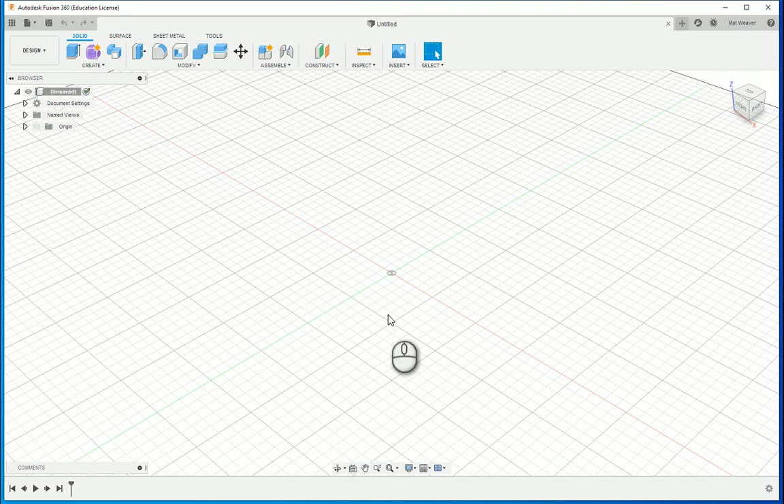Okay, so we start by drawing the holes for the speakers because that's the main point. So I'm going to select a view from which to draw, and I'm going to draw at the front because that's where the speakers are going to be for me. And I'm going to create a new sketch, select that, and I'm going to press the letter C for circle, or I could just click that one there.

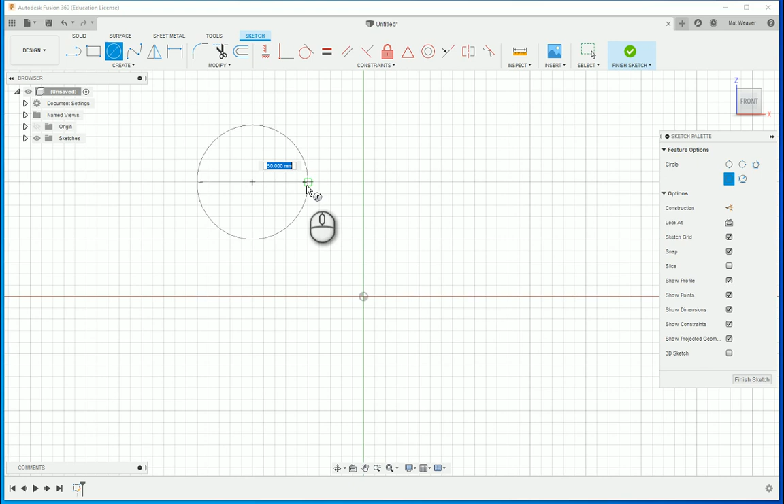I'm going to choose an arbitrary point, so anywhere to start, and just to clarify that the holes for your speakers should be about 50. The next part is the construction detail, and that is so that I can get the exact points for the holes to secure the speakers in.

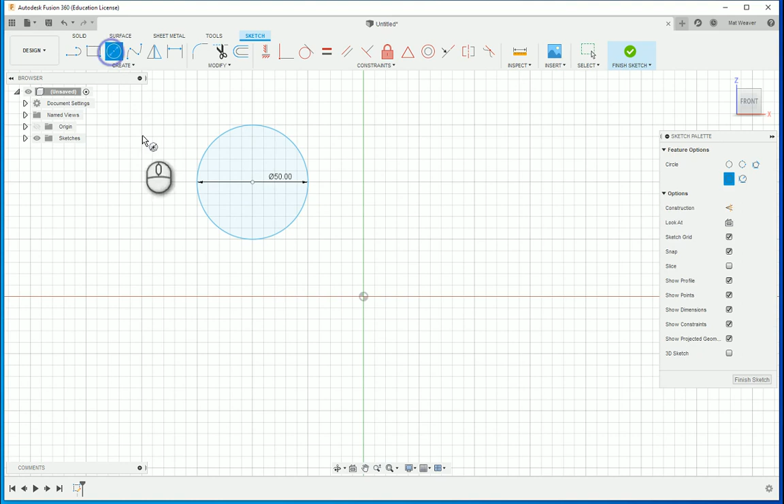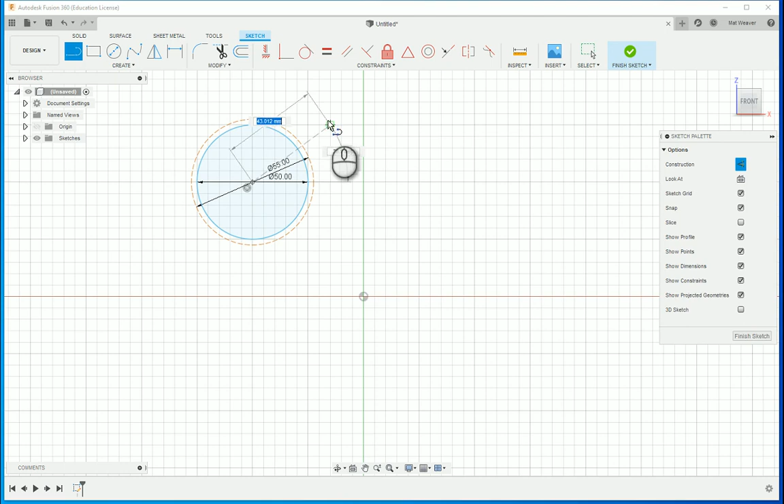Now if you measure it, I believe it's about 55. So if I click circle and click construction, click this and go 55, you'll see a dotted line going through, and these holes are at 45 degrees to the center of the circle and are at 90 degrees apart. So the easiest way to do that would be to press L for line, or click that one there, and there's my 45 degree angle.

Zoom in. I'm going to click construction off because I actually want to make this into a hole. Find the intersection, and I think a 3mm hole should be better. Now I haven't actually measured this, so this might not be 55, it might be 58, it might be 60. You'll have to measure it. Okay, so there's my hole.

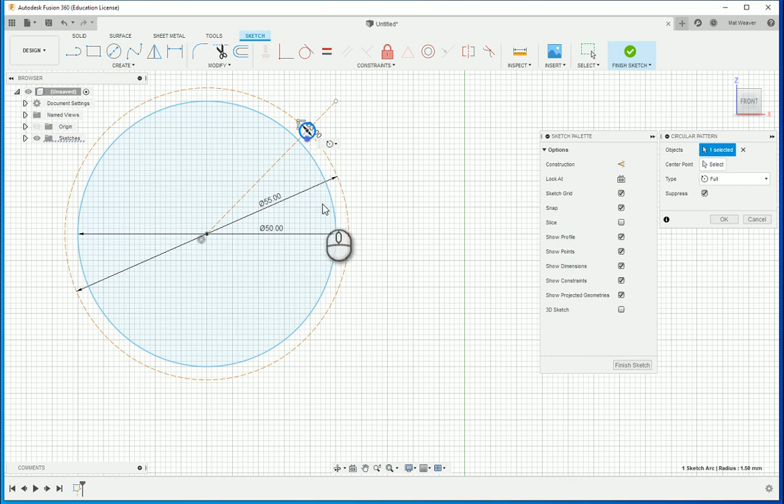Now I can repeat that all the way through, which I'm sure you can do, but I'll show you something else you might want to use later on, and that is the circular pattern. The object I want to copy is going to be that circle there. The center point of the pattern is there, and I want 4 of them. And of course 4 of those around the circle is going to be 90 degrees, and I already started at 45 degrees, so these are all in the correct spacing. So these are the holes.

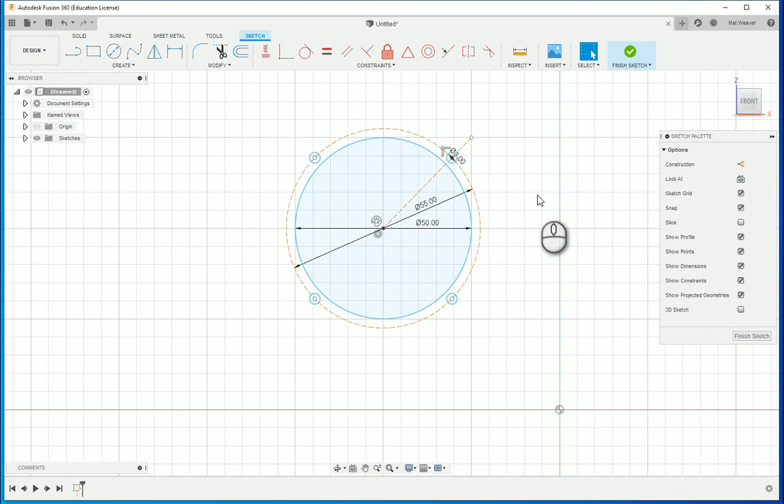Now I can delete the dotted lines if I want, but the dotted lines are only there for me. They're not there for the program. So if I start to extrude and cut away, these dotted lines will have no effect, nor will the dimensions. So it's okay to have a cluttered work surface as long as you are able in your head to ignore some of the details. Now we need 2 of these.

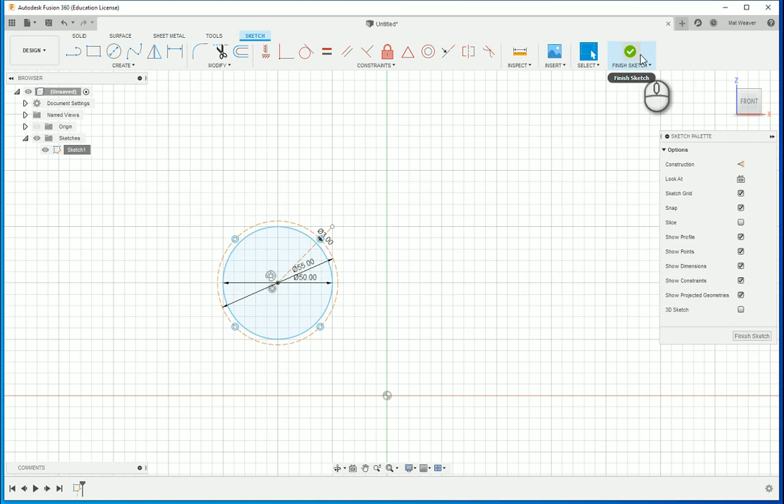So if I go here to sketch, right click, sometimes I can copy and paste it. Let's finish that sketch now. Have a look. Sketch. Oh, I can't edit and sketch. Alright, so that's going to be a pain.

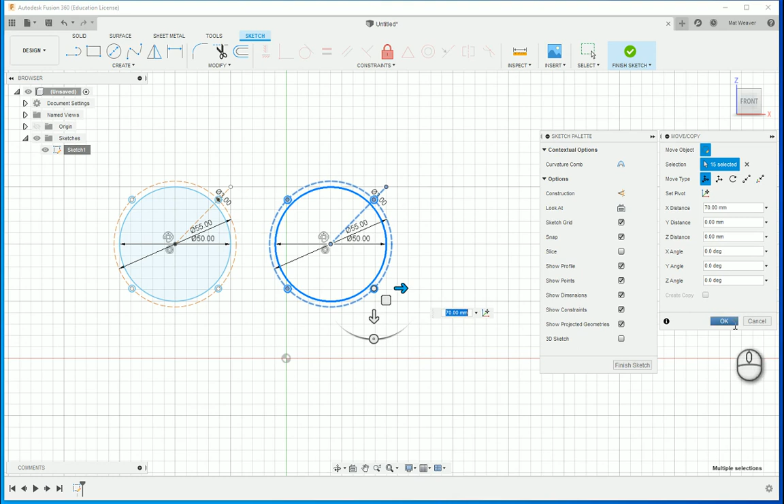So highlight that, right click, copy, right click, paste. You'll see that the handles appear, and then I can move that across. So if I'm happy that the distance between these are correct, then I can pretty much say OK. If I'm not happy, I would need to draw a line and section it so that I would know exactly where they're going to go. And be careful, that line does have to be a construction. So now I've got my holes for the speakers, and I've also got the holes to connect the speakers in.

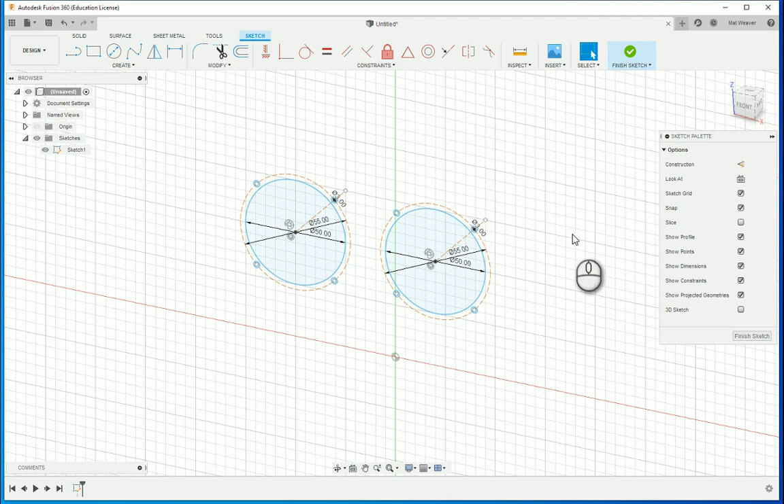Okay, so without finishing, I can now draw the front of the speaker cabinet itself, and for that I've got a plan, and that one is going to be symmetrical. So with this rectangle, I'm going to create a center rectangle from right in the middle there and come out.

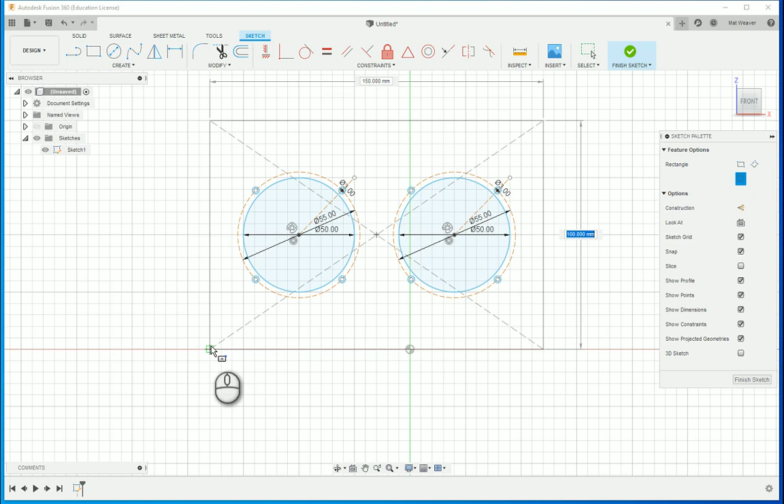So that's even, we're going to come out to there. Now remember, the outside is not the inside, which sounds pretty obvious, but let's say I made this 100 high. Well, the thickness of the material itself is going to be 3 mil, so two of those, top and bottom. Top there minus 3 mil, bottom there minus 3 mil, sides minus 3, minus 3. Well, that's 6 from the top and 6 from the sides.

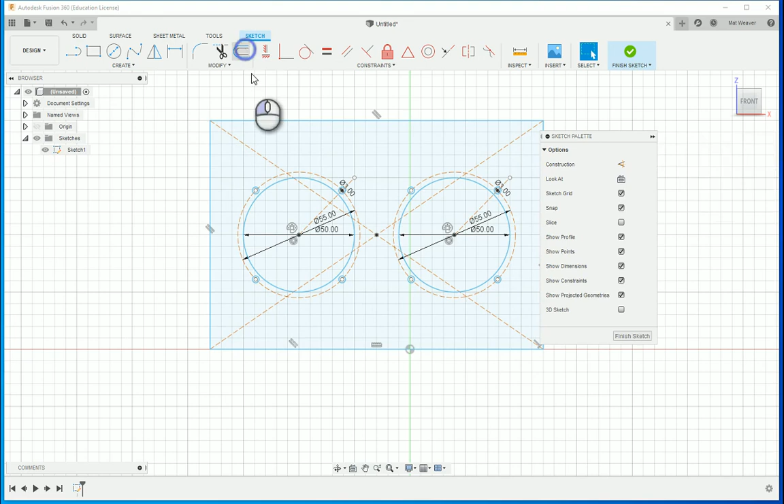So actually the internal area is going to be smaller, and a good way to find out is by pressing the letter O for offset. Select the lines to which we're going to offset, and bring it in 3 mil. Okay, so that is the space we've got, and as long as your lines don't touch the speakers, then you don't have a problem. But as soon as they do, you might want to start offsetting it on the outside to make the box bigger.

We've had students in the past making boxes that look lovely from the outside, but then when you look on the inside, they've chosen such a thick material they can't put anything inside it.

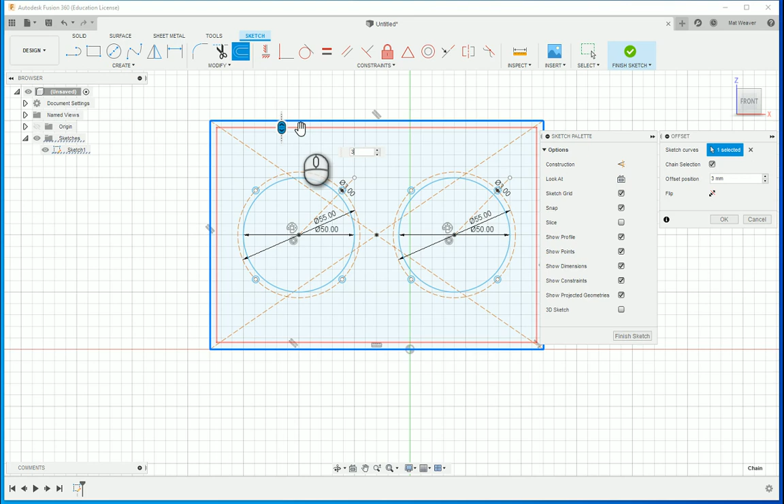Now remember, you've just got to ignore some lines yourself. You'll see what I'm doing in a minute, that's why it's going to look very confusing at the moment.

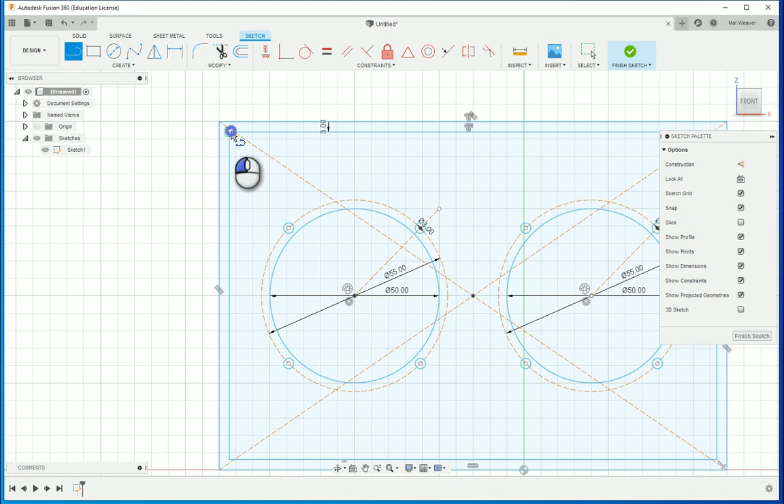The next thing is I want this to be 4 pieces of wood, so one at the top, one at the side, one at the side, one at the bottom. So I'm going to press a line, L, click that, and I'm going to click that there. So this is one piece of wood going across, and I'm going to do the same here, and the same there. So if you are able to ignore all of these details and just look here, that's one rectangle, another one, that's 4 rectangles, and they're going to be the sides, the top and the base.

The outside rectangle is the front. The circles are where the speakers are. The smaller circles are where I connect the speakers.

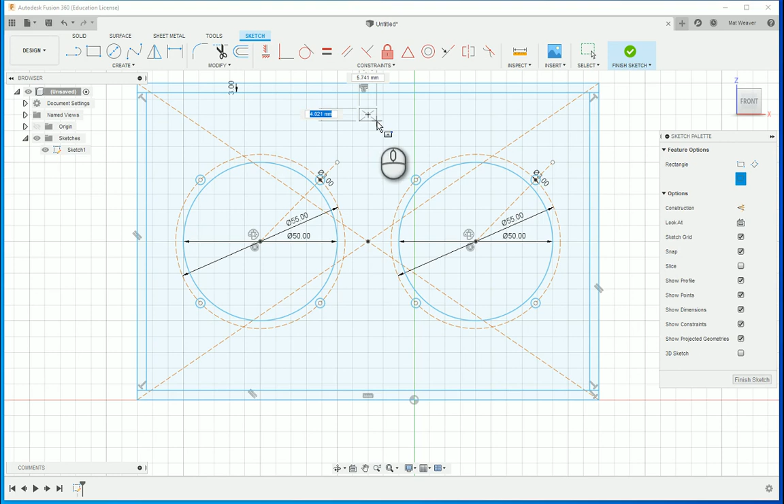The next part is to make the hole for the on button. Now again, I know the center of the line, which is here. So if I go and create a different type of rectangle, then I can do this type of rectangle. And I haven't measured the switch, so you might need to measure the switch. I'm going to say that it is an 8 by 6.

And there's another bit of confusion there, and that is going to be the hole. Okay, I'm happy with that. I'm going to finish the sketch.

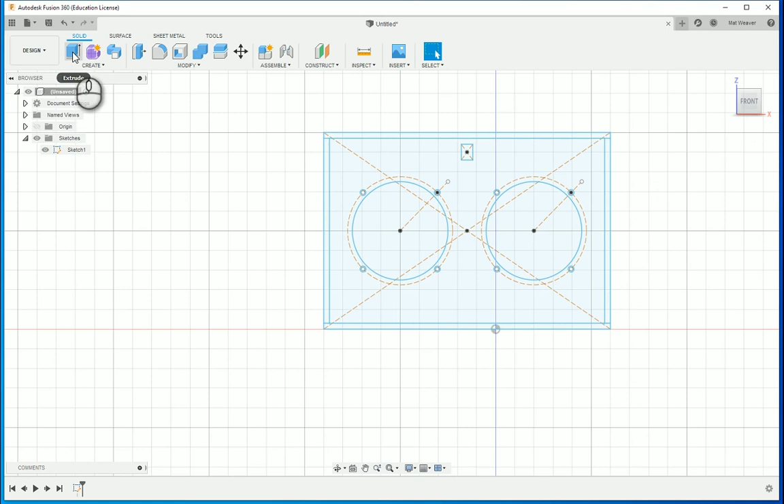And now what I'm going to do is make the front, and then move it away. So to do that, I'm going to extrude this, this one, and this one. If you half shut your eyes now, you can see exactly what I'm doing. And I'm going to extrude that out by 3 mil. I'm using 3mm material because I actually want the laser cutter to cut everything out.

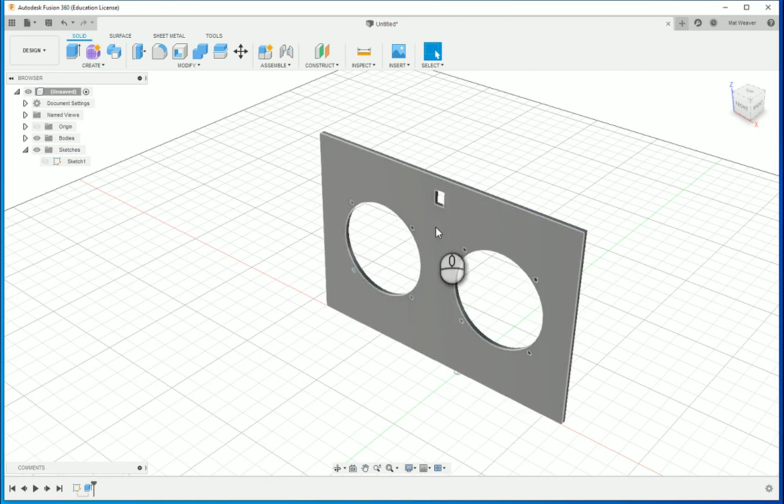Now I'm going to press OK. Now all the confusion disappears, which is actually a problem. I want that all to come back. But this is the front of the body. Let's bring all that confusion back, so I press the eye button.

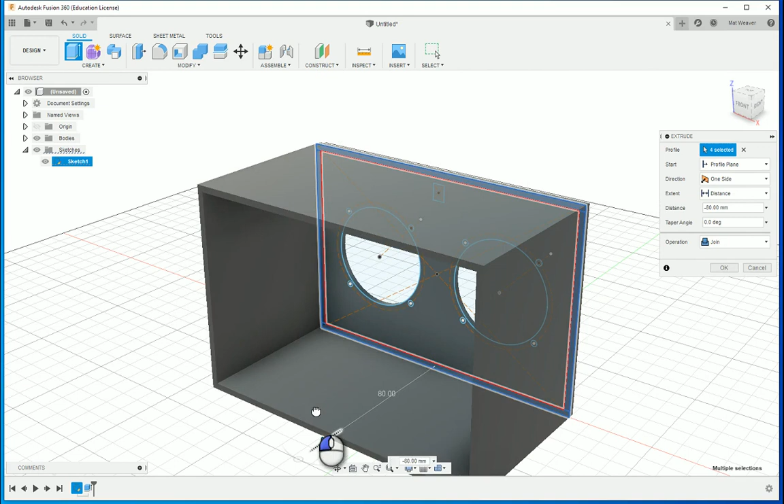Okay, the next part is this. This is on the surface, and I want this to come out. So I'm going to extrude the sides first, 1, 2. I'm going to make it complicated, I'm going to do all 4 of them. Bring it out, and I want that box to be - look at that - 80 mil, so that's fine.

If I go join, then the whole thing is made from one material, which is fine if you want to 3D print the entire thing. But if I want to laser cut all the individual parts, I'm going to have to go new body.

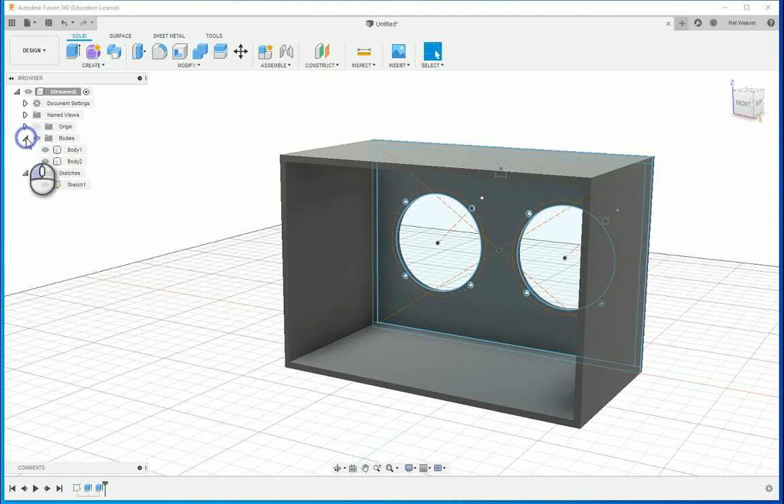Let's see if that works. Should have lots of bodies, I haven't. Okay, so now what's happened is, if I move that out of the way, you'll see that there's the top, the front, sorry, and there's the sides. But actually what I wanted to do was have all these separate.

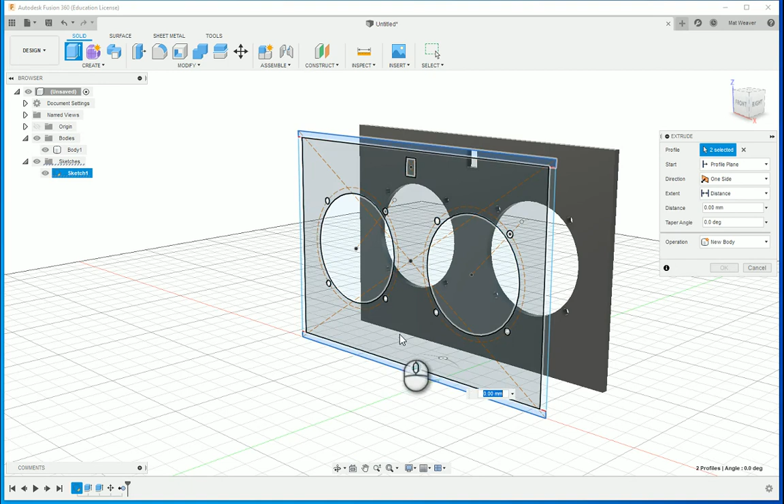So I'm going to remove that and start again. Extrude 1, 2. These aren't connected, so if I go back minus 80, new body, that's fine. And now if I go to this one, that one, and minus 80. Join, no, I want these to be a new body.

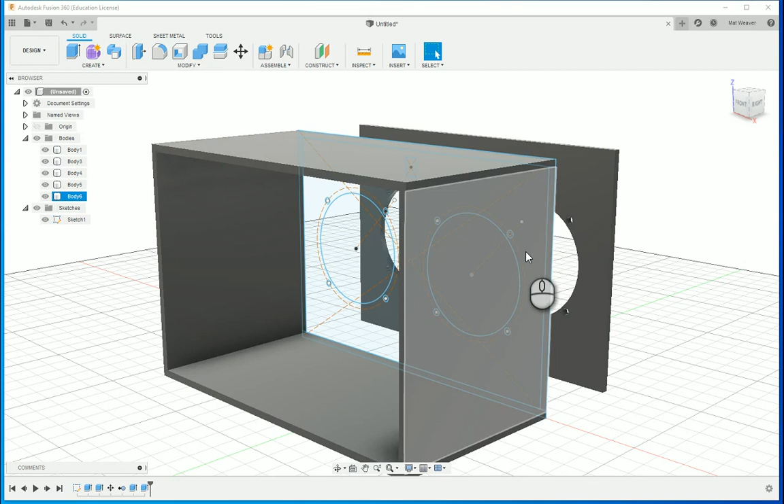To make sure they're a new body, I can just hide that, and hide that, and I can go OK. So now I've got all my parts together, and that face there can be moved back into position.

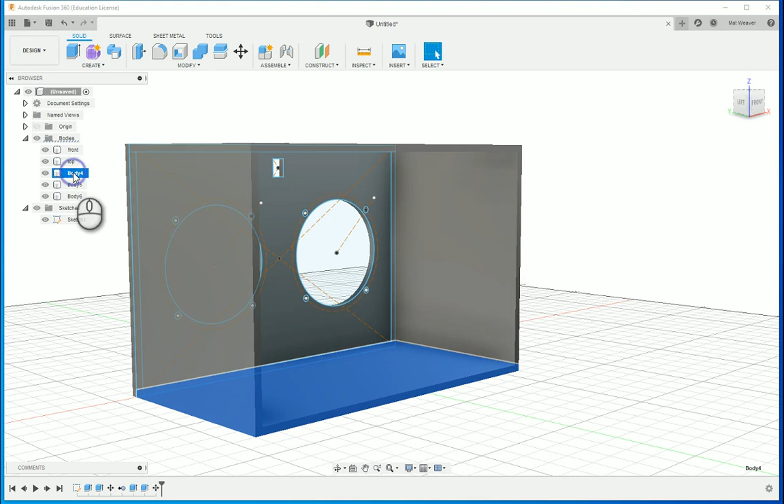Okay, so there's the box, and it's also in 1, 2, 3, 4, 5 parts. I can relabel these, that'll make my life easier later on. So that's the top, that's the base. Better get this one right. If I'm looking at the front, then that is the right side, and that is the left side.

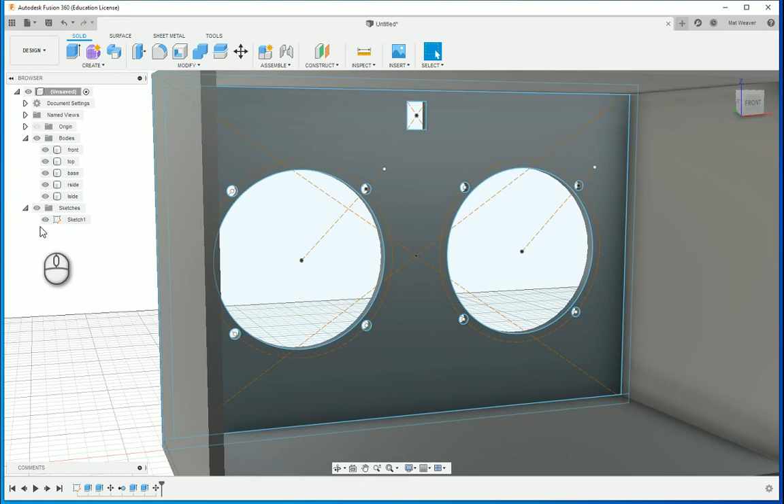Okay, the next part. Well, most of you are using tubes, so let's show you how to do tubes. I'm keeping the sketch here. Sometimes the sketch disappears and it's just because it's been hidden, but you can always bring that back up.

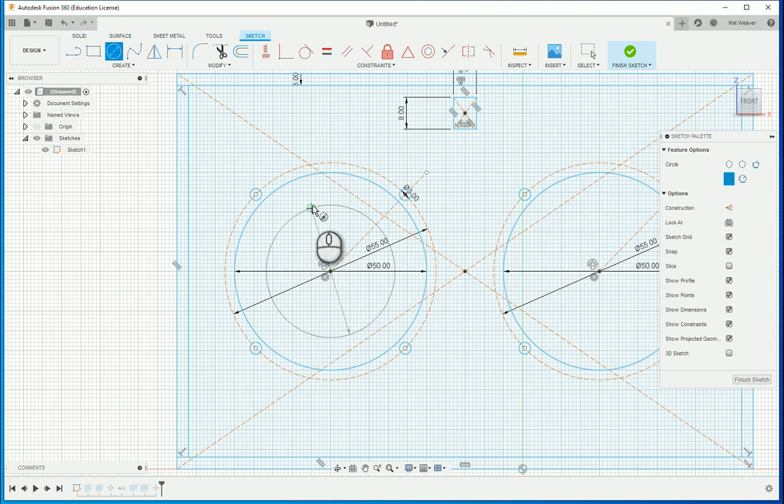Some of you are using the cardboard tubes, so let's go here. Let's edit the sketch so I don't have to redraw a sketch. We can either draw a new circle, or offset a circle. So press C for circle, bring it out, and I can put a circle there, 55. Or I can simply go O for offset and come out to where I feel that is most suitable.

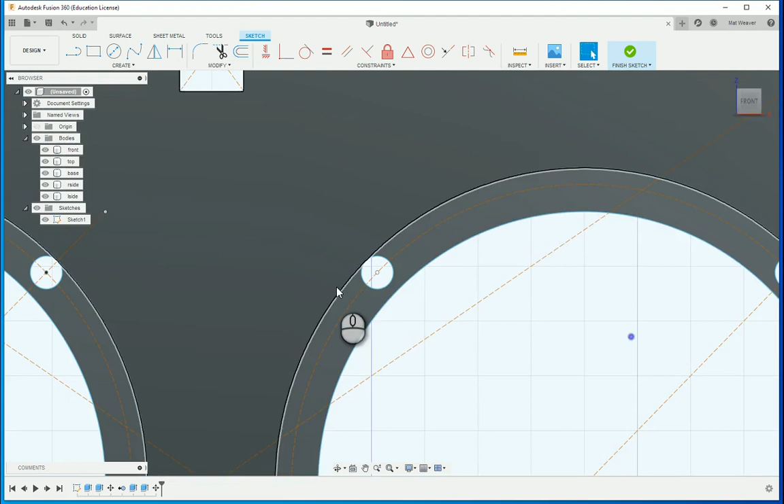Again, you're going to have to measure the material you want, unless you're 3D printing it, then it doesn't matter. Right, so there's my sketch, and I finished it, and that brought all that back. If life's getting a bit confusing, you can always hide things. Let's keep that. Let's keep the base there.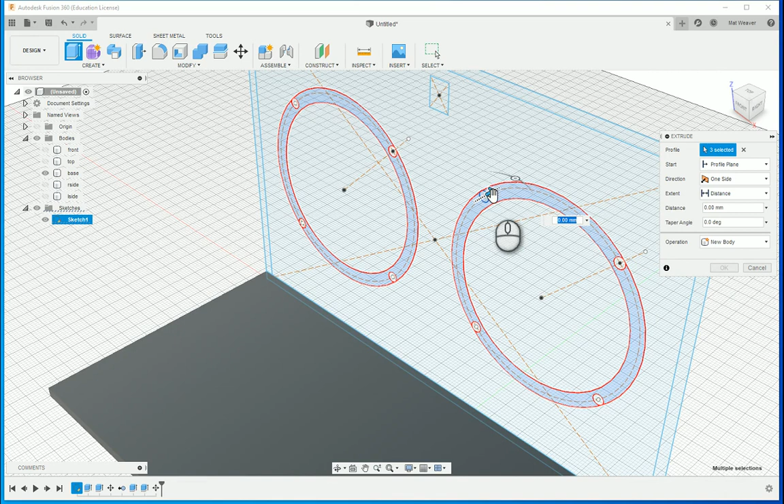Okay, so now what I'm going to do is extrude these. So extrude 1, 2. It's got the holes in there. I could have the holes if I wanted, or I can just not have the holes. Bring that back.

Now the size of the tube is of course up to your own specifications. Let's just do, I'm going to do 50, making sure that nothing is joining. And there are the tubes, and they've got the holes there, so now I can put the speakers directly onto that, and everything should work.

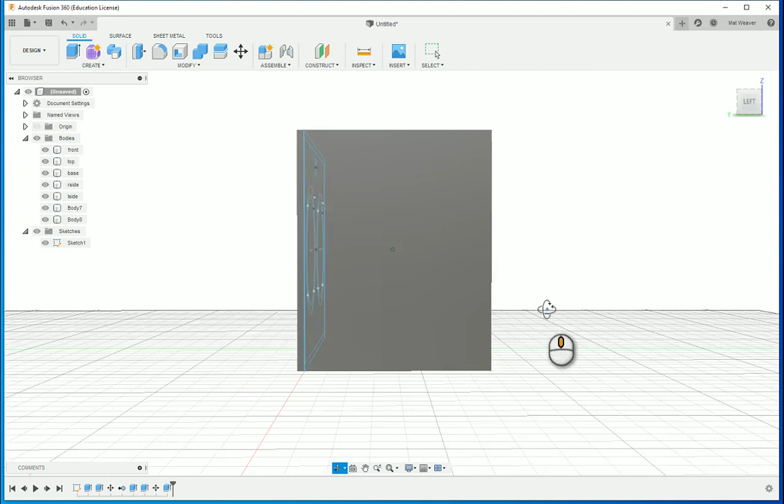So let's bring everything back in so you can see it. I've got my on switch, I've got my speakers that are going to be here and here. I can say, right, I'm going to get the metal to cover that, so I don't need to draw that. I want the circuit to be at the base, the base has got some 4 holes. If you measure those, you could maybe put the 4 holes there, extrude them up, and sit the circuit in nice.

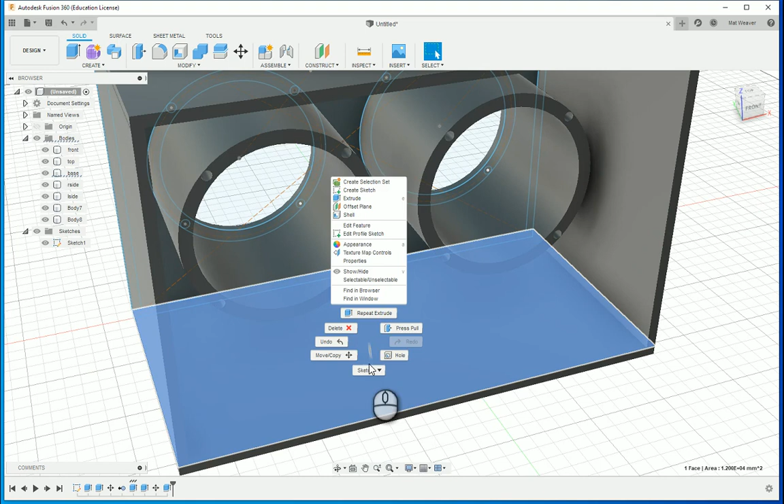Alternatively, I could select that face, hide the top. Let's hide the tubes as well. Press R. And of course I haven't measured it, but let's pretend that it's that size. Offset that.

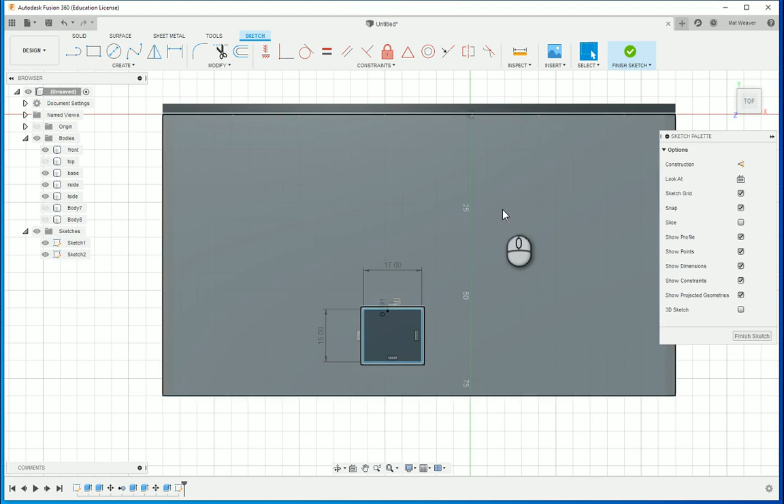Now I can extrude this. If I'm 3D printing it, it doesn't need to be separate, it could be set. If I'm not, I can just do that, and that's a new body. So this might be the area where I put a load of glue in and shove that circuit there.

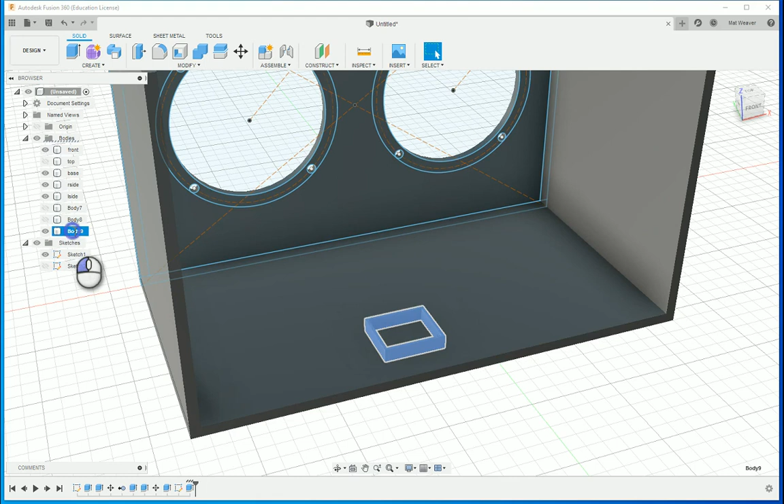Okay, it's time now to label everything so it doesn't become too confusing. So circuit. That is the left tube. That is the right tube.

Okay, let's put that top on and the tubes back in. Okay, so I've got my speakers, and now I need my battery and my back.

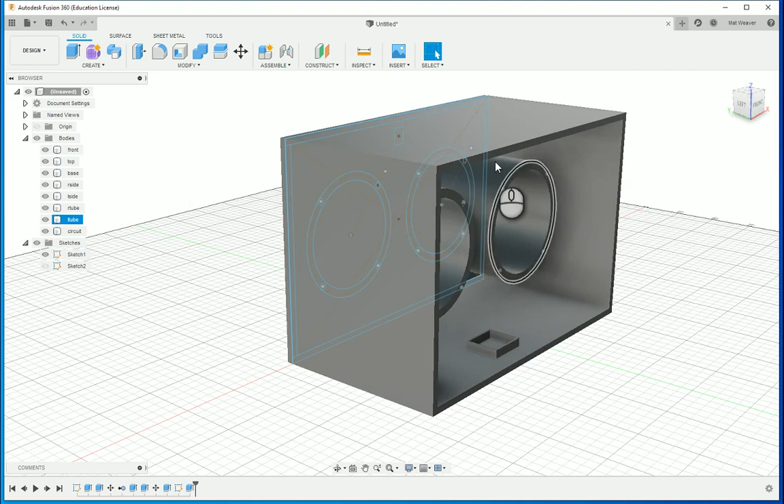To do this one, I can either go back to the front, redo the whole thing, but instead of having the holes, take the holes away, or I can start again. I'm going to start again, and that is to highlight the side, right click, create sketch. That's going to move it.

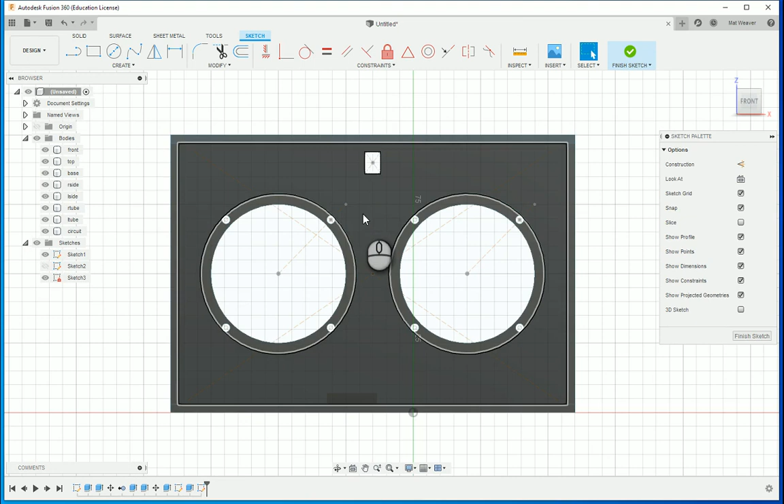Press R for rectangle, or click that. Go from there to there. Shift, move it around. Extrude. So finish your sketch. Extrude that.

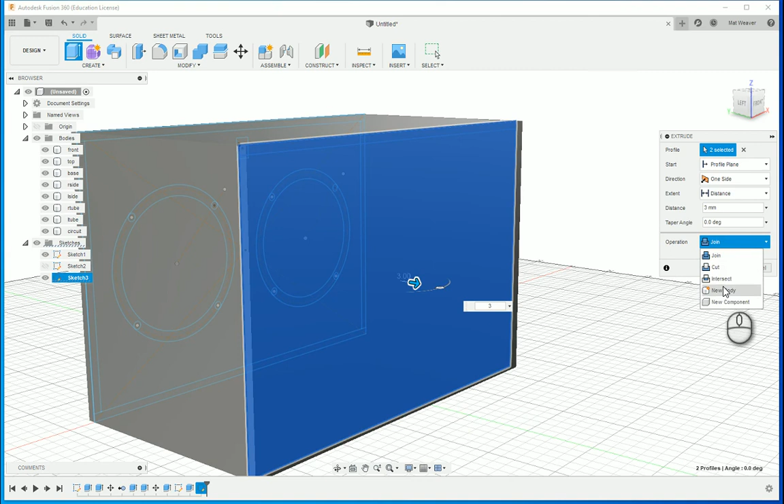1, 2, that's the back, and I want to go 3 mil. Again, do not let it join. If you let it join, we've got a big problem. New body, that's okay.

And now I can start putting in where the batteries are going. So I can't see the inside now, so that's a bit confusing. If I go visual style, hidden edges, now I can see that that is where the end of the tube is, that's where the circuit is.

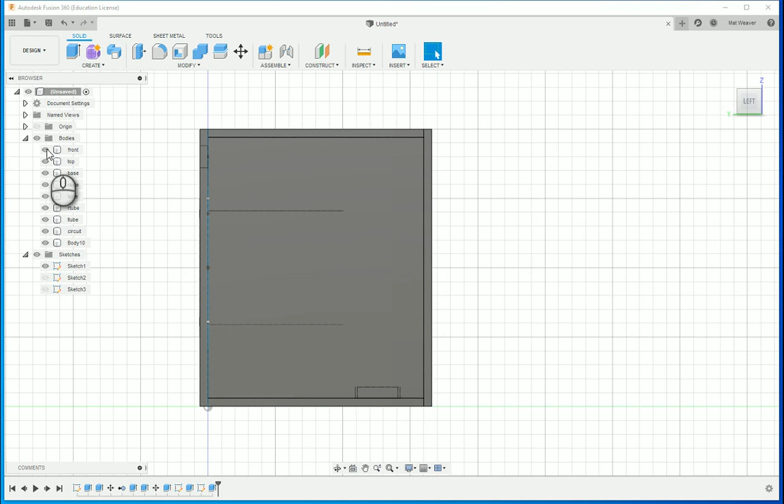The batteries are pretty safe going in here. So let's hide all of this, especially that side. And now I can see exactly where the batteries are going.

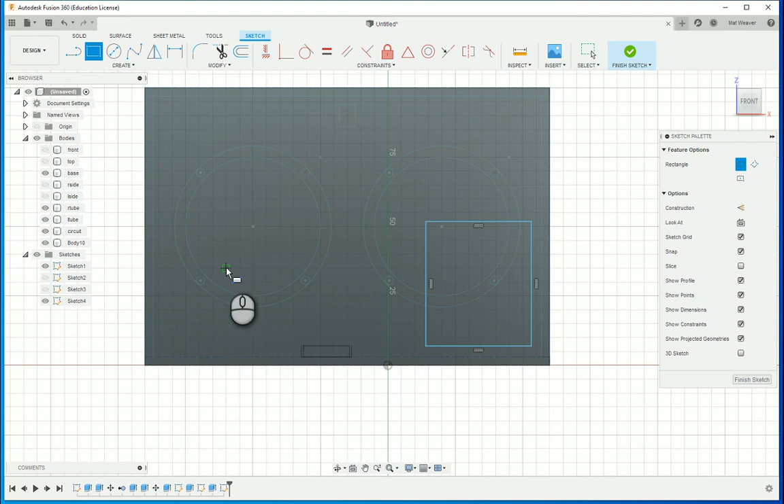Again, your job to measure. I've been a bit lazy and not measured it. I'm going to put let's do that there. So I'm going to pretend that that is the right size. And I'm going to finish that sketch.

This is for the batteries. Click that, push it in. It should go red, and that's a cut line there. And then I can actually have my batteries sticking out here and glue those in. It's going to be a bit ugly, but let's find out what that looks like.

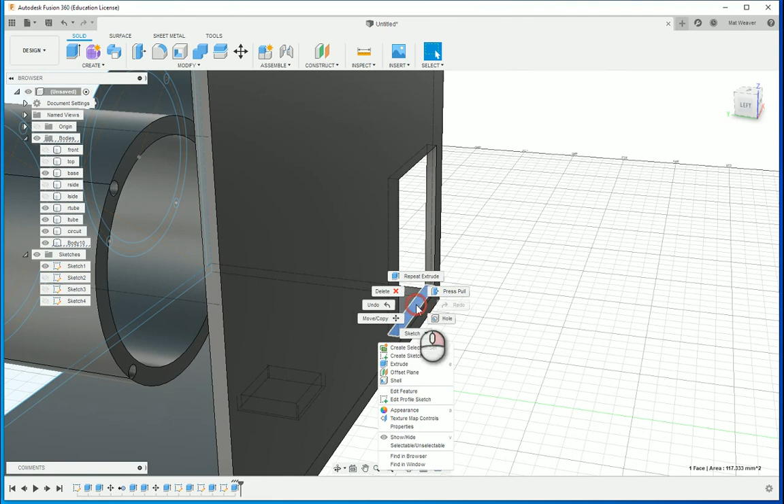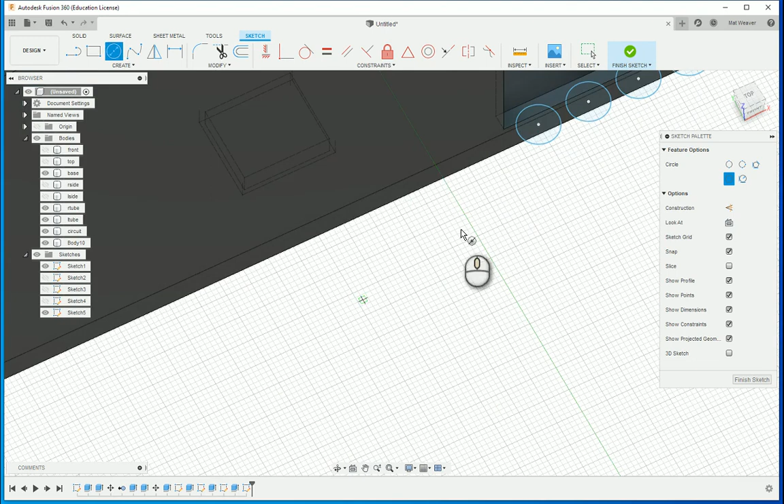So, how do I do that? I create a sketch. That's 4 batteries. Finish that sketch. Extrude those. 1, 2, 3, 4.

1, 2, 3, 4. Make sure your new bodies. It's going to go cut first. New body, okay.

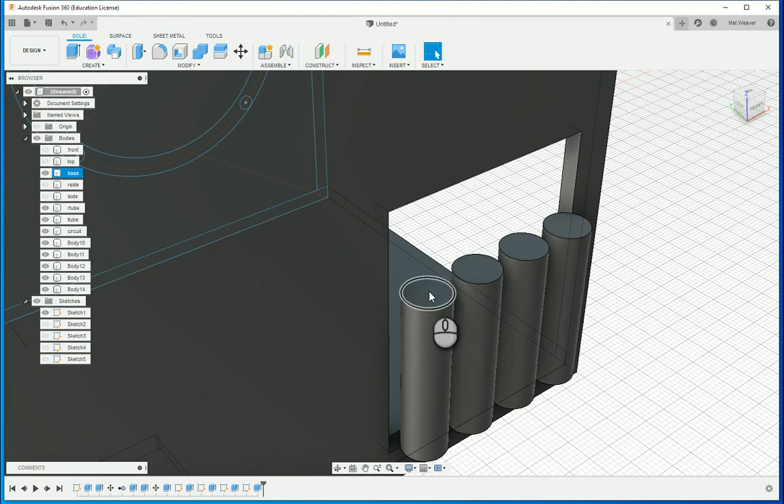I can even do this. I'm just playing now, probably just wasting your time, but let's do it anyway. So 4, 4, 4, and the last one 4. Finish that sketch. Extrude. So I'm actually just drawing batteries. These are symbols.

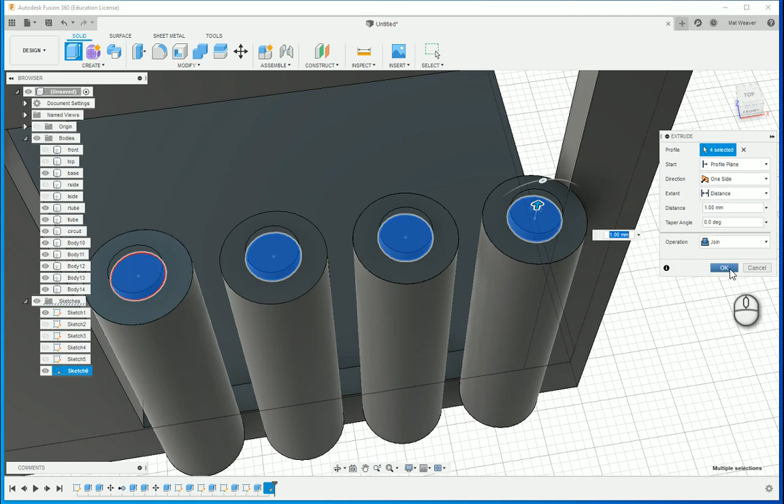Okay, and we're going to join those. If I go here, these are the bodies, 1 to 4. That's me holding shift. Right click on the word itself, otherwise life becomes difficult. And just shift that around a bit there. Okay, so that's where the batteries are going to go.

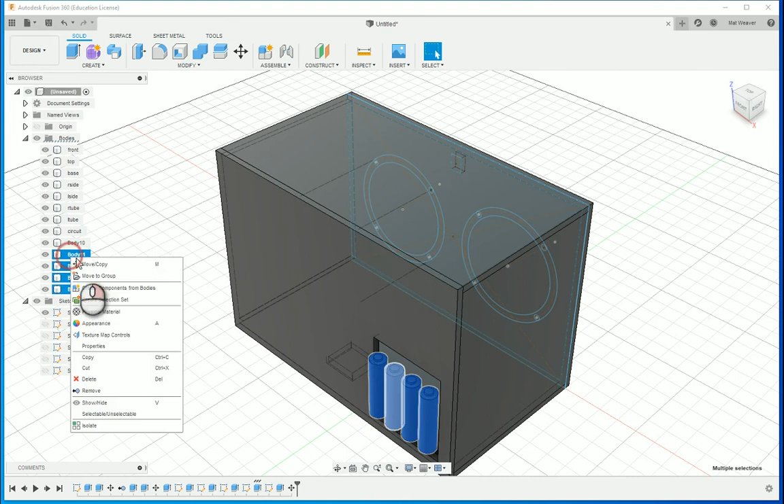And now, if I make everything go back, there are the batteries there. So can they go through? And the answer is, of course, yes they can. So I can put them in there and actually glue that whole battery compartment there.

And then I know I've got the batteries, I've got the switch, I've got the 2 speakers, I've got the 2 tubes, I've got the top, everything there. And then I've got the circuit. Now you've got quite a few lessons to just do this and play around.

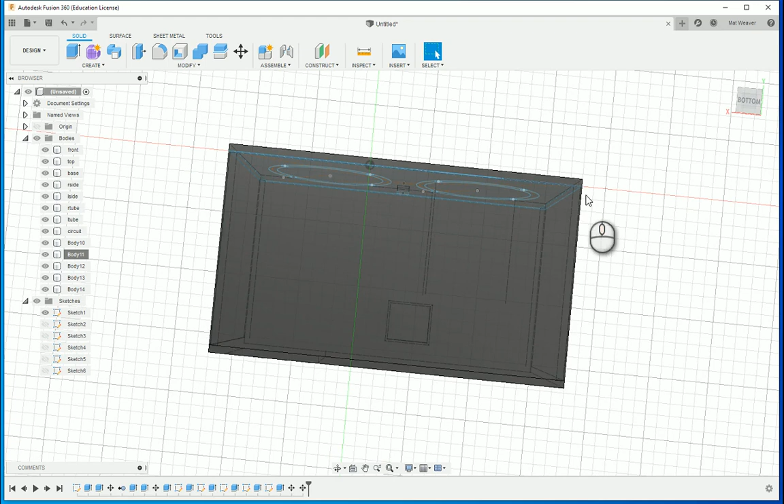If you want feet, you should now know how to do the feet. You would click on the bottom of it or the base, you go create sketch, make a circle if that's the shape you're after, choose a point, there they are. And you can now, because I've taught you how to do the patterns, let's try the rectangular pattern.

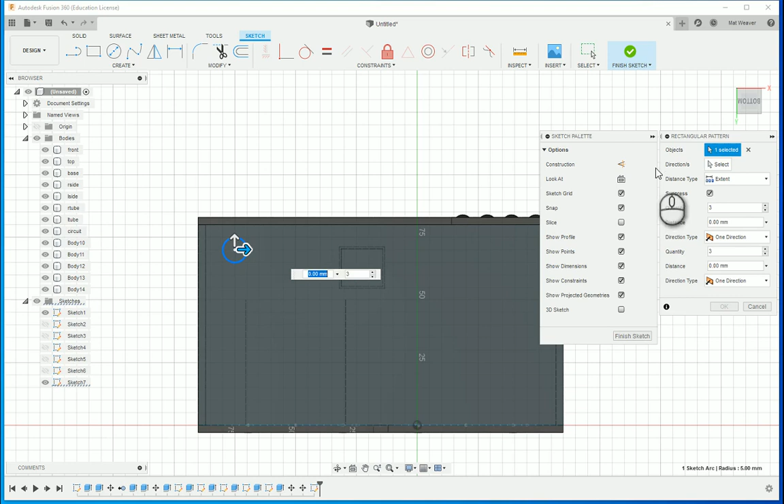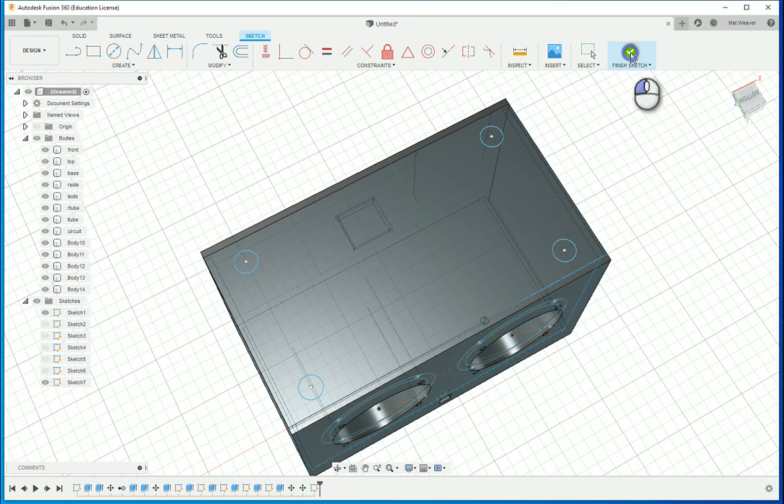The object we want is that's the object. We want 4, is that right? I think it's actually 2. So we'll go down to 2, we'll go there, and we'll come down and we want 2 there, not 3. And that's another quick way of doing stuff. Finish that sketch and then of course extrude, extrude, extrude, extrude.

And we're going to make that a new body again, so don't join it. And of course I can then go modify and fillet. Where's fillet there? F for fillet. Click 1, 2, 3, 4, and fillet is to give it a nice round edge.

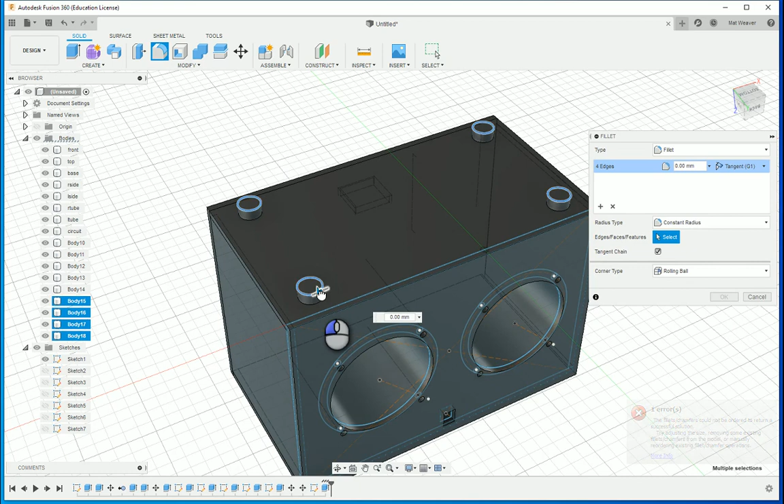Okay, and that's your speaker. If you want holes, you now know how to do holes. If you want to add stuff, you now know how to add stuff. And you know how to round stuff and make patterns. If the sketch is confusing you, you can remove those. Okay, and that's basically it for that part.

In the next video, I will show you how to cut it using the laser cutter.